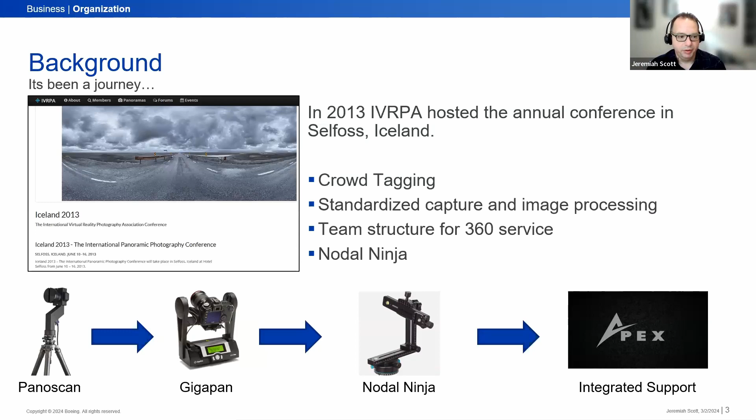So here's a couple of those use cases. As a quality systems specialist, I need a web-based physical view of the airplane in order to drive defect containment so that mechanics, electricians, and inspectors can communicate first-time quality issues back to the installation plan and reduce repeat problems on the airplane. The example being shown is inside the wing tank of a 737.

So we're climbing inside of a wing tank. In this area you can actually fit fairly well in -- it's pretty compact. You have to get special training and suits and all sorts of requirements to be able to get in there. But physically it's a pretty small space. And as you get further and further outboard on the wing, the height gets smaller and the length gets smaller, so we end up having small access holes that we actually just pop the camera up into.

And as it gets even smaller still, we use things like the Theta or the Insta cameras to fit in very, very small spaces where you can't even fit your head into. But that allows us to get access and photographic records of the build in small spaces that people can't easily visually inspect or really understand how we actually build something and relate it back to the drawing definition.

When we want to improve a process or change the order of operations in which something's assembled, providing a design definition, a 3D model, is fantastic because we can lay it out and see if the part will fit in that space, or figure out how the part gets installed so we can position it into that location. All sorts of things like ergonomics are supported that way. But again, that's the design definition.

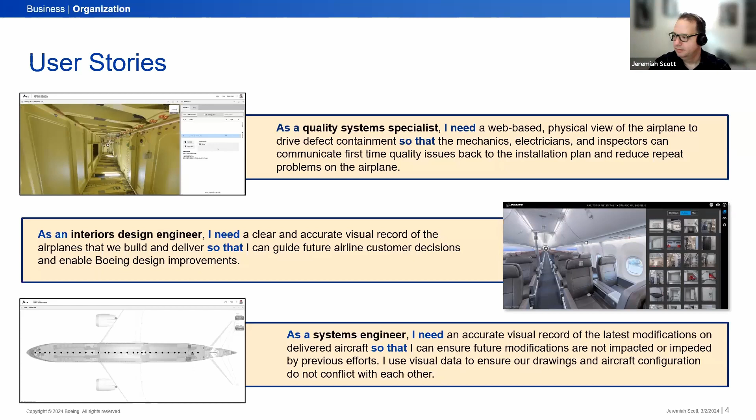All right, I'm flying along here. This is a nice little demo. Scott mentioned earlier about digital twins. Essentially, a digital twin is the design definition of what is built, completely modeled in 3D. That allows us to plan the engineering. It lets us take individualized parts specific to that aircraft and show what it looks like in 3D space relative to aircraft coordinates. It's an amazing capability.

It allows us to update the design definition based on what's actually being installed, whether or not a part is there on the 3D model, and reflect that based on whether it's actually installed on the aircraft—dynamically updating the 3D model based on what's being built. Of course, you can add in all sorts of metadata, like part numbers, IPs, engineering drawings, associated with each individual part for each individual airplane.

But functionally, you still need to take what's designed and relate it to what's actually being built, and prove that what we're designing is what we're making. So this is a technology my team developed that allows us to relate in 3D space. These are two different applications: we have an internal 3D viewer showing a specific aircraft, a 787.

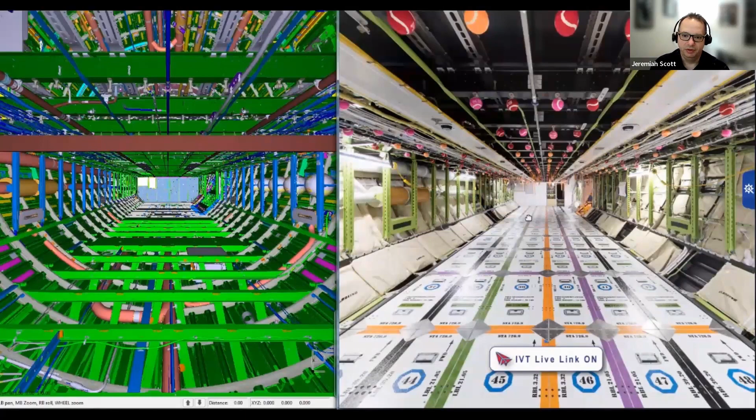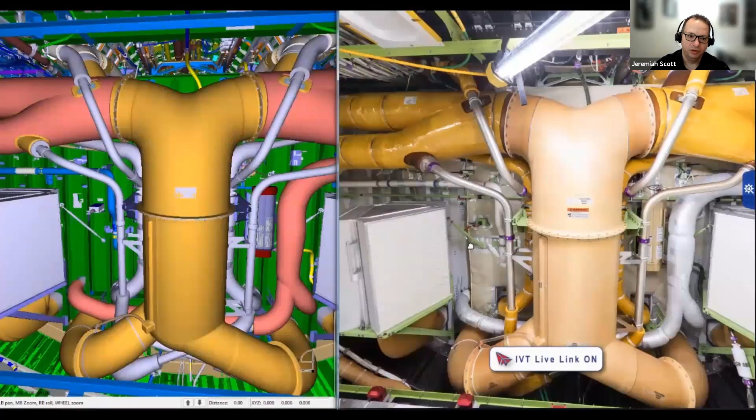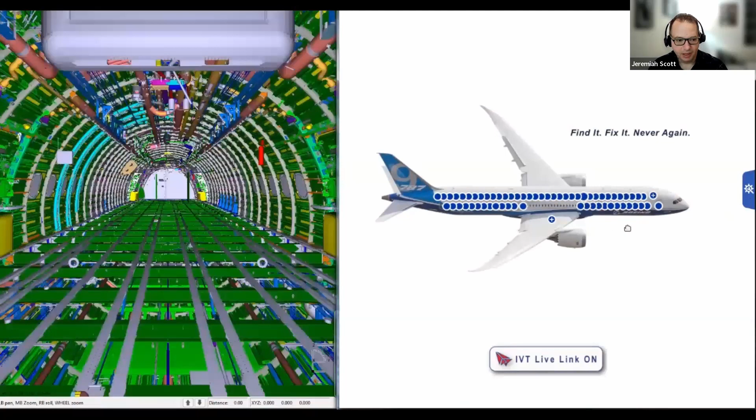On the right, you have the 360 virtual tour. As we move through this space, it's updating the physical as-built viewpoint and sending those coordinates and that vector over to the 3D model. So you can dynamically move through the space and compare that yes, this is that part, and here's what it's meant to look like—here's that wire run, exactly as we meant to run it, and here's what it was designed to do. You can jump through anywhere on the airplane. It's been an amazing tool for engineering, production, and all sorts of use cases.

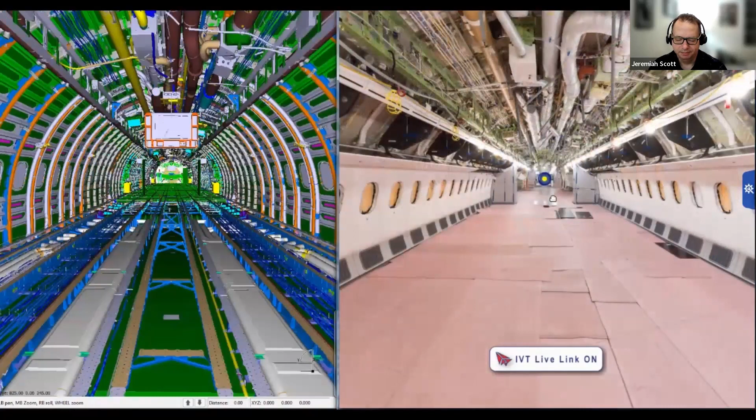Here's the main cabin on the 787. We're just moving through, and you can see how this updates the design definition. All the systems and wires that run under the floor aren't seen because we have what we call the PS floorboards, the safety protective equipment over the floor. So things like this enable us to compare the as-designed to the as-built, and you can see how some of those capabilities tie together. It's been a pretty exciting capability.

What we're doing here is taking the station waterline buttock line—a 3-point location relative to aircraft coordinates where the camera was physically set up in that space. That's your point of origin, and then we have our vector, in other words, where you're looking in space from that point of origin. We don't need to know the exact coordinate point, just a starting point to create the relationship between where you're looking in the 360 view and the design definition. They're two different coordinate systems, and there are different coordinate systems depending on where you are in the airplane, so there's all sorts of nuances with this.

We have to convert a localized coordinate system to a global coordinate system, then create the API interface to connect the two different applications so they can talk to each other. Essentially, you're taking a repeatable process where you're capturing a 360 image in the same place every time, stitching it the same way so you know which way is forward, localizing that forward location between the two applications, and then including the IVT or design model coordinate locations into the metadata for that image so they can talk to each other. Those kinds of capabilities are really exciting for enabling the digital twin and grounding our design definition to the real world.

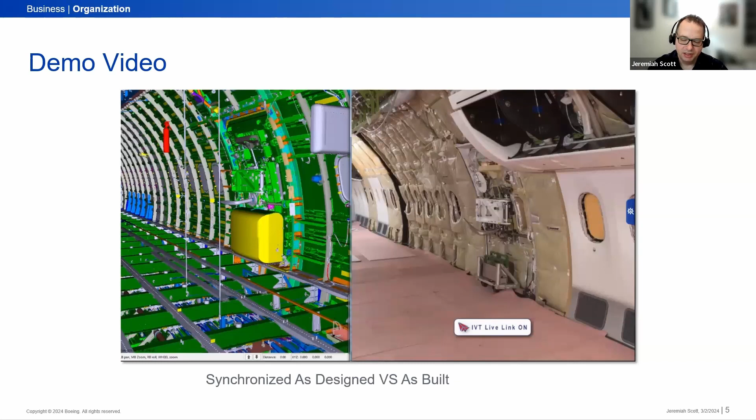All right, hardware and processes. How am I doing? Okay.

Our hardware kit currently uses a D850, which is unfortunately at end of life - thank you, Nikon - and an AFS 8 to 15 millimeter zoom lens, which is not ideal. But maximizing the field of view for a lens on top of the sensor, creating the little black borders around the edges and corners, allows us to maximize the resolution we get and balance it against the number of shots needed to get that resolution.

We run into situations where we can never quite find the exact lens we need to support the use case. So we've been looking at going to manufacturers to build a custom lens to support higher resolution and limit the distortion and chromatic aberration that fisheye or zoom lenses often create.

We use a wireless trigger to trigger the camera without having to bump it, and we use a tripod - I hope everybody does.

We also implemented color checker cards, which as we got more use cases to support, we found that color matters. We wanted the lighting systems and teams that put together the interior lighting for the lavatory, the galley, the main cabin, or the cargo areas - all of those teams pay a lot of attention to color quality. And while each person views their screen on a different, generally uncalibrated monitor, we make sure that what we deliver as you move from scene to scene or 360 to 360 balances and matches what we also capture in our stills.

All right, and this is the last slide - lessons learned. The tools by themselves are not the solution. I think in the industry, we all get very excited about this technology. We're very passionate about it. It's really, really neat, but the tools themselves don't fix anything. One of the things I like to think about is a hammer doesn't build a house, right? You need the process, you need the supplies, you need the people, and the engineering to understand how it needs to come together. So the 360 tools, the visualization, the coordinates, the engineering, the specifications that we pour ourselves into is fantastic and needed and helpful, but by itself, it doesn't do anything.

We've had a number of examples over the years where we've built an amazing virtual tour. It's gorgeous, it's beautiful, it's done, it's delivered, and then somebody moves on, or the person moves to their program, and it doesn't get used. We've also had the opposite effect when we are tying in and having better communication and understanding of how the tour is going to be used before we ever go shoot it, before we even build the requirements. So as we go into each project, one of my expectations for the team is that we understand what we're building, why we're building it, and how it's going to be used before we put together an estimate of support.

Are the models displayed on the left screen created rather than scanned? Yes. In the 3D model you're talking about—let me go back to that one so we're comparing apples to apples—this guy. The 3D model on the left is sequentially created for each line number based on the configuration of that airplane. In other words, yes, each part in this is represented.

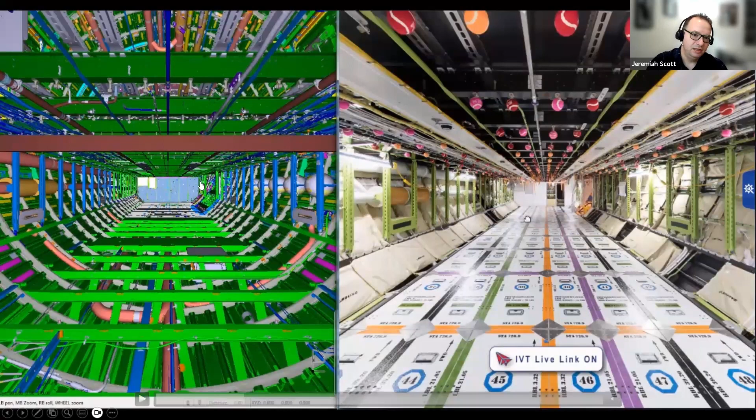Each part in this is a unique geometry. It has its own life. What they've done is taken all this geometry for each individual part, everything from the fastener to the bracket, and created a systematic approach to assemble all of those based on the coordinates and design definition of the entire airplane.

We call it IVT, the integrated visualization tool, which allows all of this to be sequentially created. Again, this is the design definition—a different need and a different capability—but being able to equate that to the as-built allows us to create a lot of value in our information lifecycle and prove that what we're building matches what we're designing. Hope that answers the question.

How do you deliver virtual tours to your customers? What are the hosting and access control considerations? Ooh, fun.

Most of the tours we deliver are internal to Boeing. We do support delivery to airline customers, but generally we think of customers as business partners inside Boeing. Boeing is its own huge ecosystem—we all have our own content needs, and each of those also have their own access control considerations. Each Boeing employee has their own identification number based on how you access your computer. That information gets fed into our internal security system, which validates whether or not you have access to whatever content you're trying to access. We apply those same permissions and controls to each tour we deliver.